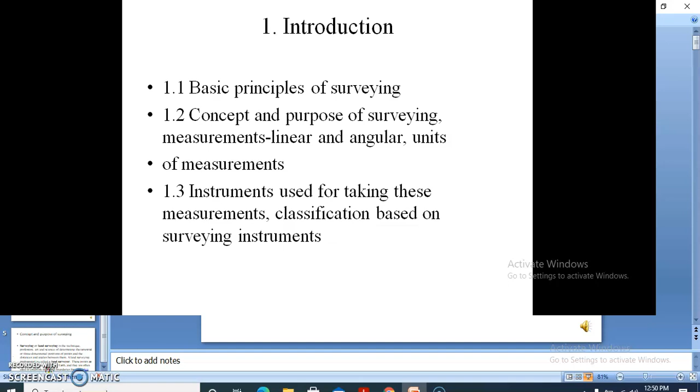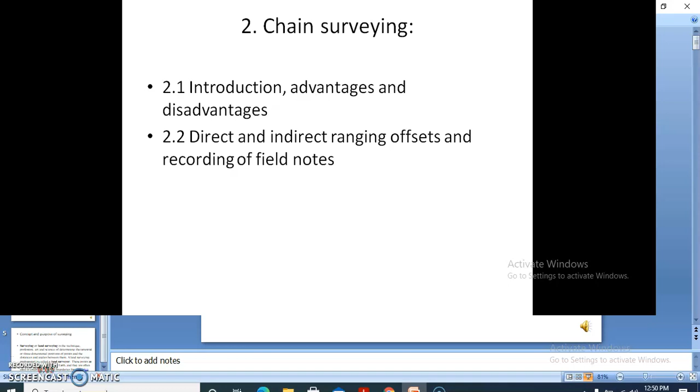And second chapter is chain surveying. First one is introduction, advantages and disadvantages of chain surveying. Second, direct and indirect ranging offsets and recording of field notes.

Let's start. Basic principle of surveying. The fundamental principles upon which the surveying is being carried out are: first one is working from whole to part, second one is after deciding the positions of any point, its reference must be kept from at least two permanent objects or stations whose positions have already been well defined.

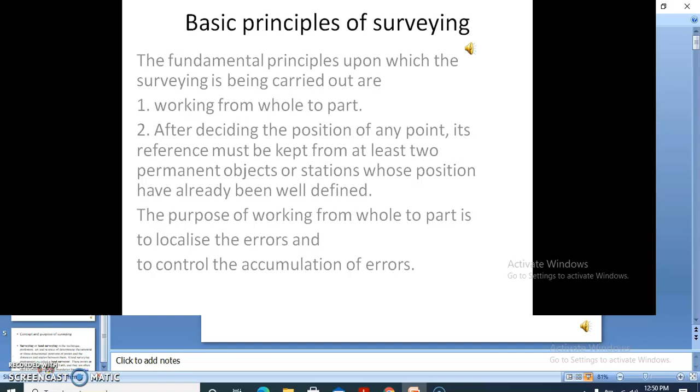The purpose of working from whole to part is to localize the error and to control the accumulations of errors.

Concept and purpose of surveying. Surveying or land surveying is the technique, profession, arts, and science of determining the terrestrial or three-dimensional position of point and the distance and angles between them. A land surveying professional is called a land surveyor.

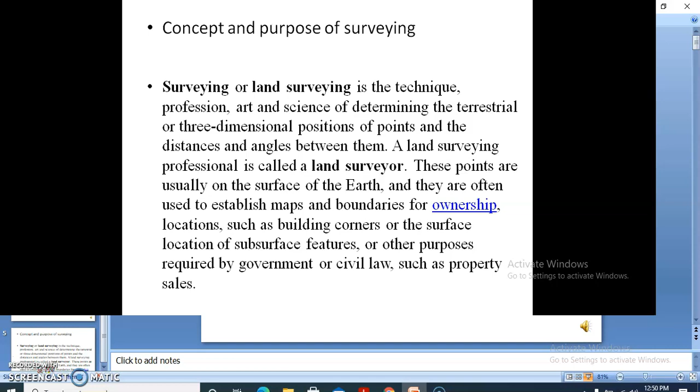These positions are usually on the surface of the earth and they are often used to establish maps and boundaries for ownerships, locations such as building corner or the surface locations of subsurface features or other purpose required by government or civil laws such as property sale.

Measurement, linear and angular. Types of measurement in surveying. Surveying is the art of making suitable measurements in horizontal or vertical planes. This is one of the important subjects of civil engineering. Without taking a survey of the plot where the construction is to be carried out, the work cannot begin.

From the above definition, we conclude on two types of measurement in surveying. These are as follows: linear measurement, angular measurements. Now we will go on with the discussion of each of these types of measurements along with their subtypes.

Linear measurements are further classified as follows. First one is horizontal distance, second vertical distance. Horizontal distance. A horizontal distance is measured in horizontal plane. If a distance is measured along a slope, it is reduced to its horizontal equivalent.

Horizontal and angle vertical distance. A vertical distance is measured along the direction of gravity at that point. The vertical distance are measured to determine difference in elevation in various points.

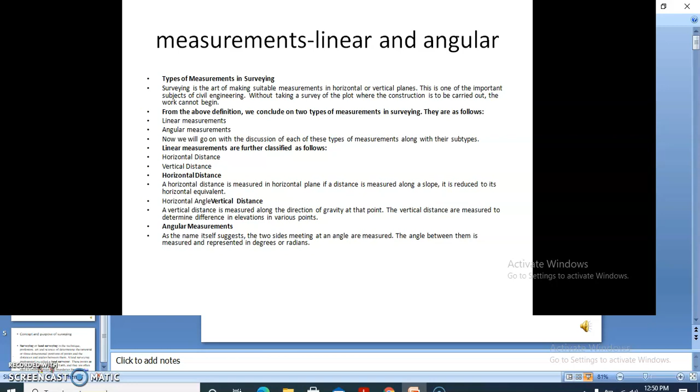Units of measurement used in past and present survey are for construction work like feet, inches, fractions of inches. For most surveys, feet, tenths, hundredths, thousandths. For National Geodetic Survey control surveys meter like 0.1, 0.01, 0.001 meter.

The most used equivalents are 1 meter equal to 39.37 inches equal to 3.2808 feet. One rod equal to one pole equal to one perch equal to 16.5 feet. One engineering chain equal to 100 feet equal to 100 links. One gunter's chain equal to 66 feet equal to 20 meters. Gunter's links (lk) equal to 4 rods equal to 0.020 kilometer.

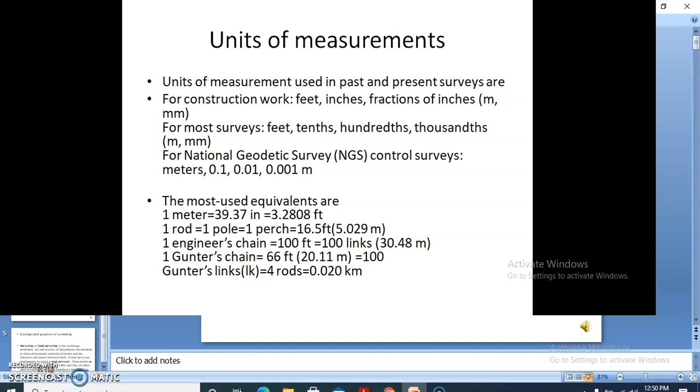Instruments used for taking these measurements: alidade, tables, dumpy levels, engineering chains, graphometer, laser scanning, level staff, measuring tape, plane table, pole surveying, prism surveying, prismatic compass, ranging rod, surveyor's chain, tape surveying, theodolite, total station, tripod, universal instruments.

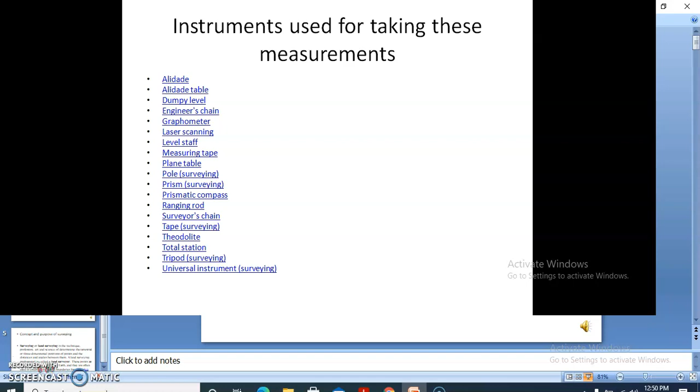Classification based on surveying instruments. Classification based on instruments used: chain survey, compass survey, theodolite survey, plane table survey, tachometric survey, aerial photographic survey, remote sensing.

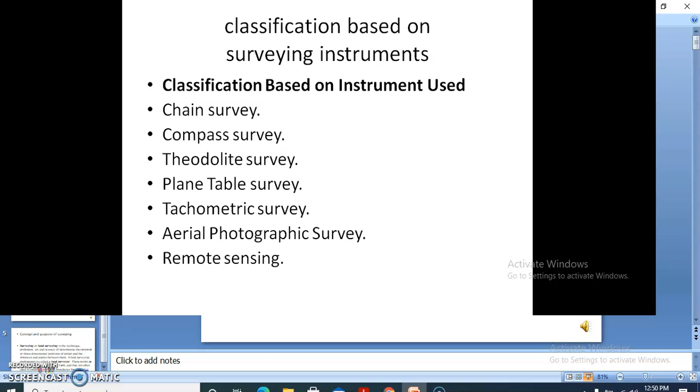Next one is chain surveying. Surveying with a chain or tape used for determining distance, for linear measurements, suitable for surveys of small extent on open ground, purpose to define boundaries of a piece of land or to take some details. Denotes measuring distance either with the help of a chain or tape, direct measurements.

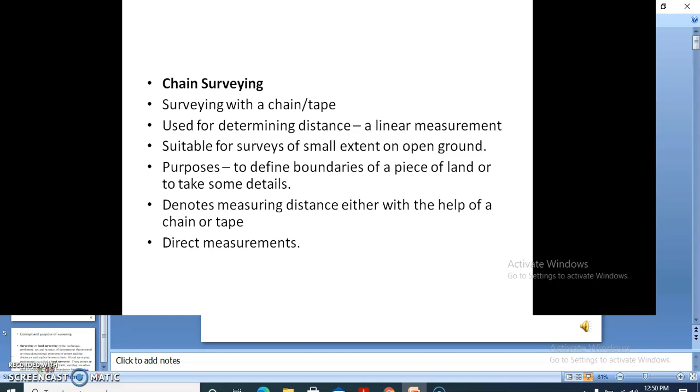When the area is flat, distances are measured in straight lines. When the area is undulating or has obstacles, the lines have to go in a zigzag fashion. Direction of the lines is necessary when required for plotting on paper. Compass is used to define direction. Compass gives the bearing of a line. The bearings are required for plotting the line on paper. Every map has to be provided with a north. Plane table surveying: in normal surveying, field observations are taken first and then plotting is done in the office.

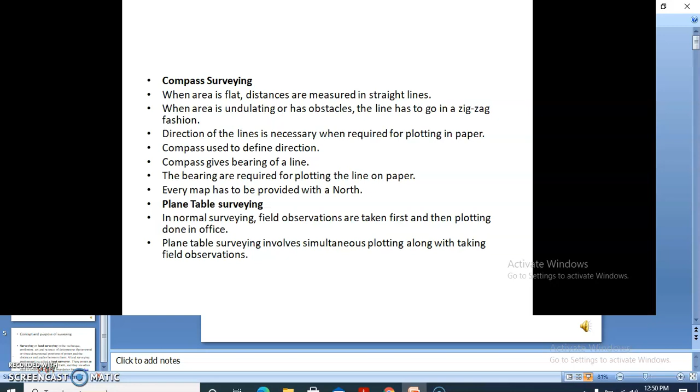Second, plane table surveying involves simultaneous plotting along with taking field observations.

Levelling: the other types of survey give only the horizontal dimension. The vertical coordinate is defined by a level denoted as reduced level or elevation, used for defining alignment of roads, for setting of drainage lines.

Next, theodolite surveying. Instruments such as chain, compass, and level give one form of dimension. Theodolite is used for both horizontal and vertical measurement in the form of angles, works on the principle of optics, used for defining angles, unlike compass that gives only bearing.

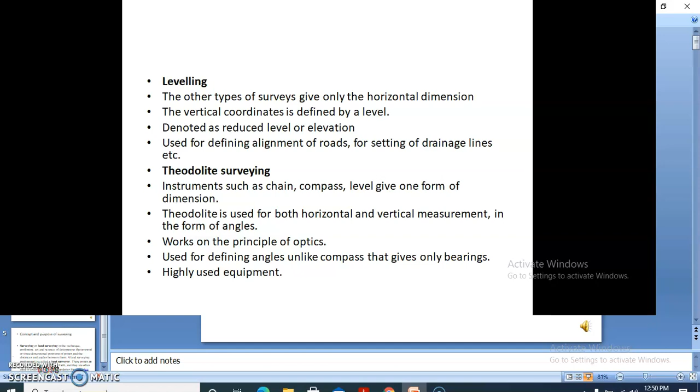Used equipments: chain survey, chain. Before the metric system was implemented in India, a 100 feet engineering chain, a 66-foot Gunter chain, and a 33 feet revenue chain were used. Now metric chains of 5, 10, 20, and 30-meter length are used.

The surveys use more of the 20 and 30-meter chains. The chains are 4 mm wide. They are made of small links of galvanized wire of a certain diameter. Each link is made into a circle loop by bending it and connecting the links with a ring to make the whole chain, so that the chain is flexible.

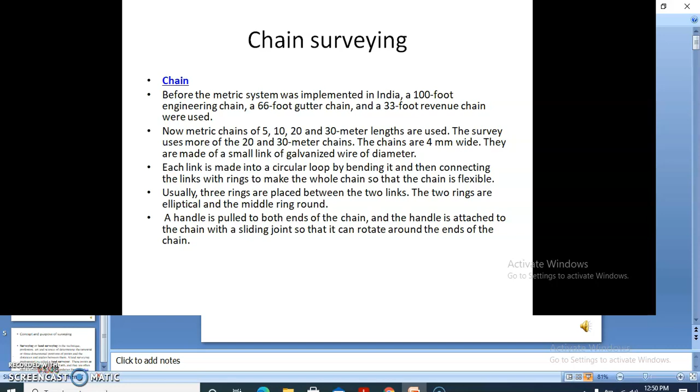Usually three rings are placed between the two links. The two rings are elliptical and the middle ring round. A handle is attached to both ends of the chain, and the handle is attached to the chain with a sliding joint so that it can rotate around the ends of the chain. This is the image of the chain.

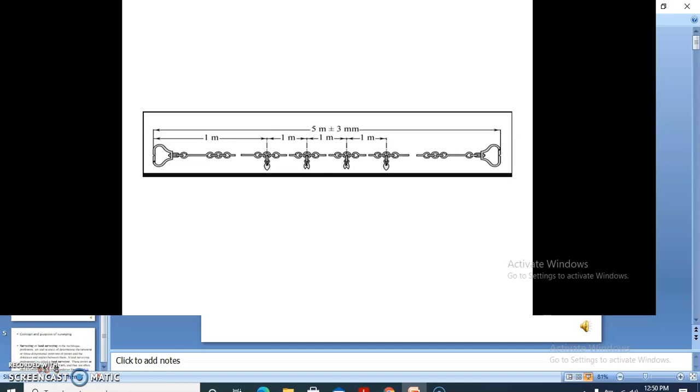In measuring a surveying line, the chain has to be laid out on the ground between the stations. If the line is short, the chain could be put in alignment easily, but if it is long or the end station is not clearly visible, then intermediate points have to be established in line with the endpoints to know the direction of the line by ranging.

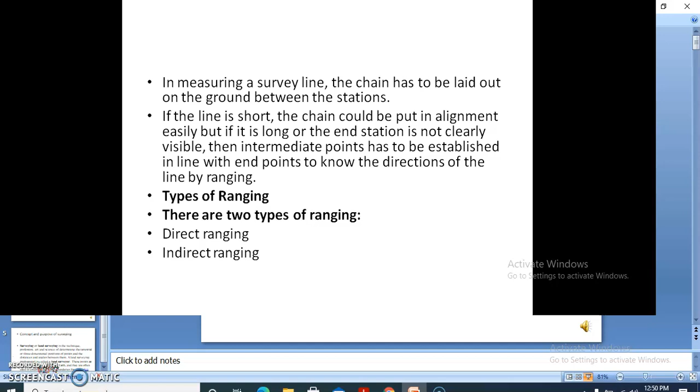Types of ranging: there are two types of ranging, direct ranging and indirect ranging. Direct ranging is possible when the stations are intervisible. Ranging is done by eye judgment. Ranging rods are erected vertically beyond each end of the survey line.

The surveyor stands 2 meters beyond the ranging rod while the assistant holds the ranging rod vertically at the intermediate stations. The ranging rod is held roughly in line by the thumb and forefingers. The surveyor directs the assistant to move the rod to the left or right until the three ranging rods appear to be in a straight line.

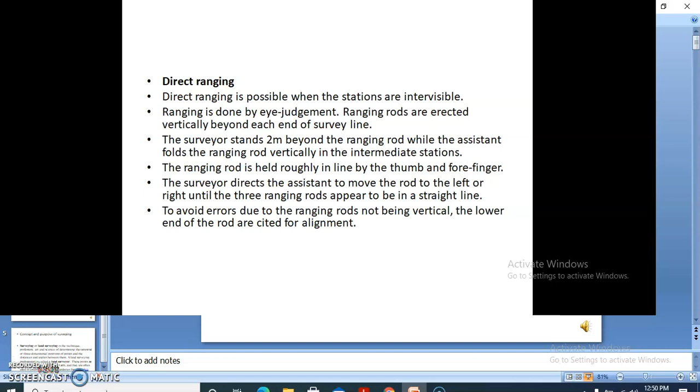To avoid errors due to the ranging rods not being vertical, the lower end of the rods are sighted for alignment. Indirect ranging.

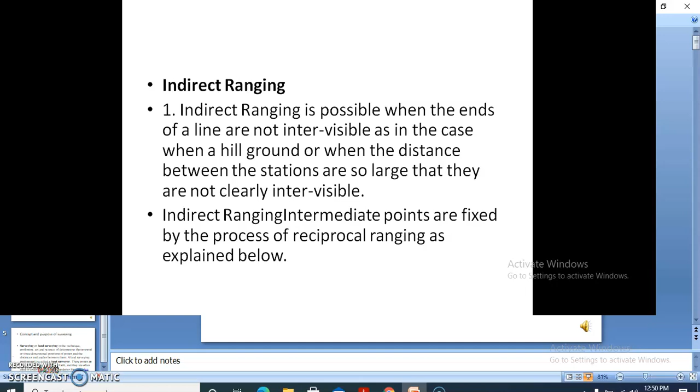Indirect ranging is possible when the ends of a line are not intervisible, as in the case when there is a hill on the ground, or when the distance between the stations is so large that they are not clearly intervisible. In indirect ranging, intermediate points are fixed by the process of reciprocal ranging as explained below.

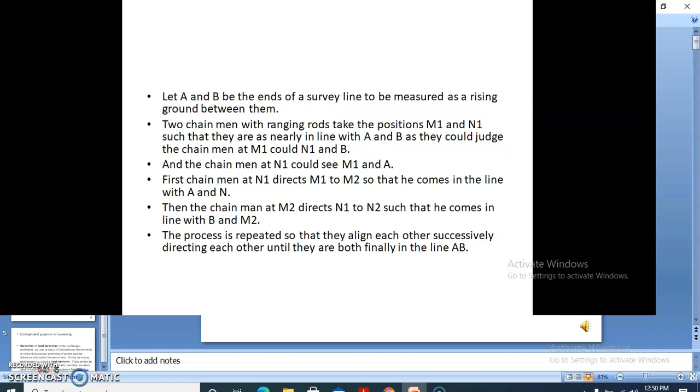This is indirect ranging. Let A and B be the ends of the survey line to be measured, with a rising ground between them. Two chainmen with ranging rods take the positions M1 and N1 such that they are as nearly in line with A and B as they could judge.